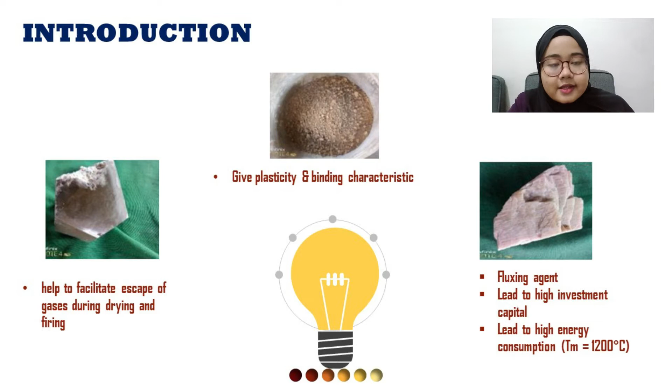The high price of feldspar is because it comes from natural resources. Using feldspar in the formulation of ceramic tile also leads to high energy consumption because the melting point of feldspar is high, which is at 1100 degrees Celsius to 1450 degrees Celsius. Next, I will continue with the problem statement.

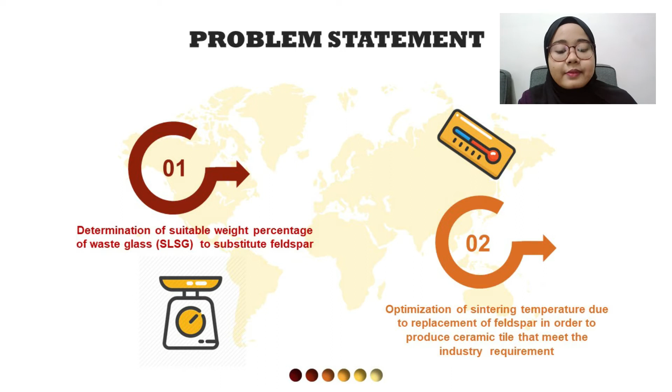The use of feldspar will lead to high cost because the raw materials are gained from natural resources, and it is difficult to gain compared to waste glass. In the previous study, the researchers have used waste glass in the formulation of ceramic tile. The problem statement is the determination of suitable weight percentage of waste glass to substitute feldspar and the optimization of sintering temperature due to replacement of feldspar in order to produce ceramic tile that meets the industry requirement.

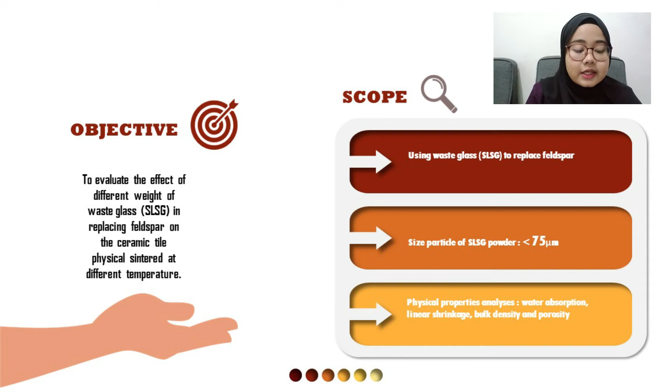The objective of this study is to evaluate the effect of different weight of waste glass in replacing feldspar on the ceramic tile physical properties sintered at different temperature. And the scope of this study: the first one is using soda lime silicate glass to replace feldspar. The second one is the particle size of material used is below 75 microns. And the third one is the analysis of the experiment is physical analysis, which is water absorption, porosity, bulk density and linear shrinkage.

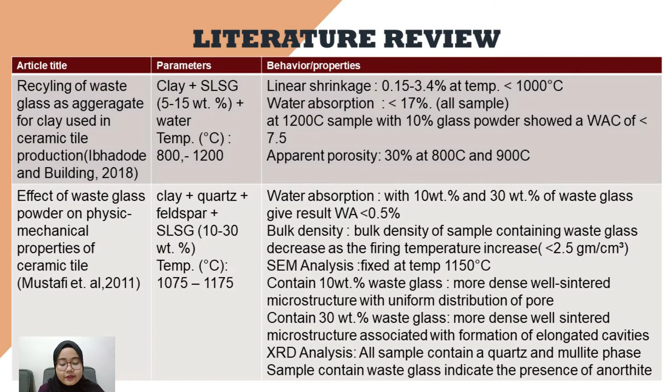For the literature review, here is the list of journals that I have referred. The first one is from 2018, with the article title Recycling of Waste Glass as Aggregate for Clay Used in Ceramic Tile Productions. And the second one from Mustafi et al. 2011, Effect of Waste Glass Powder on Physical Mechanical Properties of Ceramic Tile.

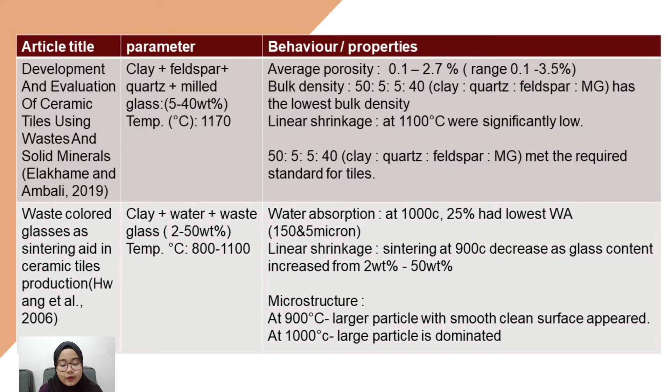And the third one is Development and Evaluation of Ceramic Tiles Using Wastes and Solid Minerals by Elakhame and Ambali 2019. And the last one is Waste Colored Glasses as Sintering Aid in Ceramic Tile Productions from Hwang et al. 2006. Okay, next I will continue with the methodology.

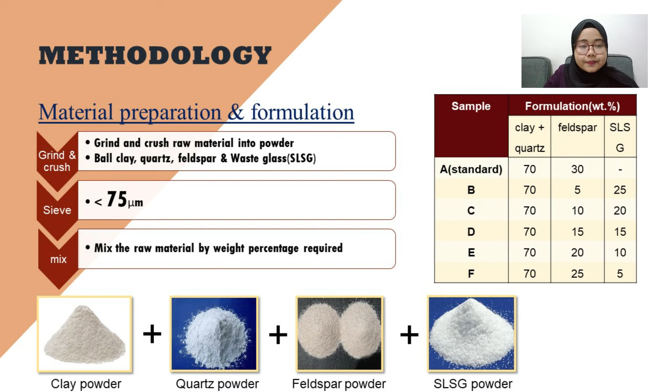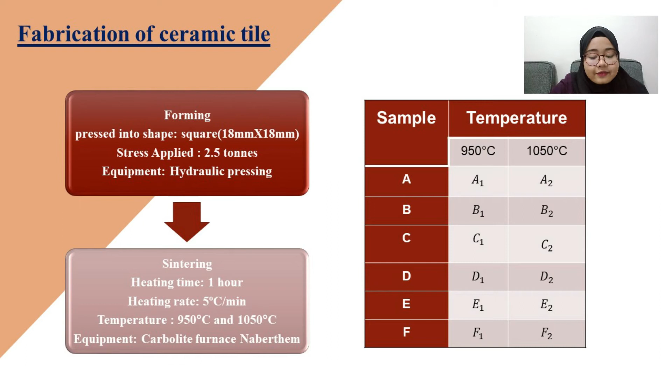Then the experiment will continue with the fabrication, which is forming and sintering. In the forming process, the mixed material was pressed into a square shape of size 18 mm times 18 mm by using hydraulic pressing. The stress applied is 2.5 tons. For the sintering process, the samples were heated at 950 and 1050 degrees Celsius by using a carbolite furnace. The heating time is 1 hour and the heating rate is 5 degrees Celsius per minute.

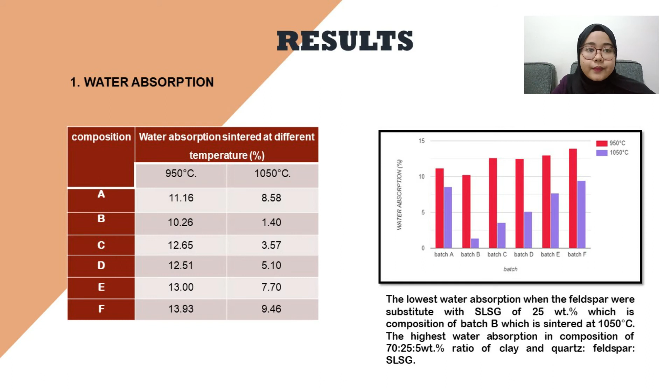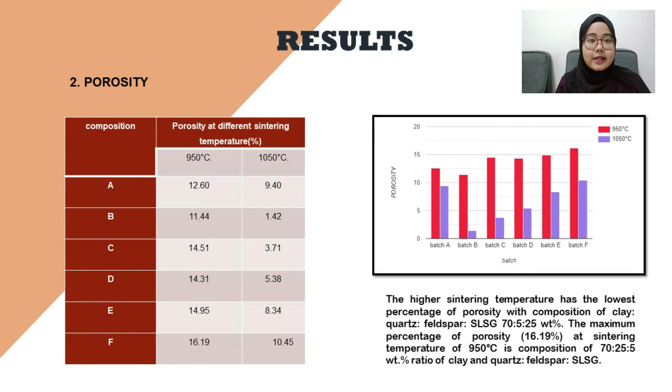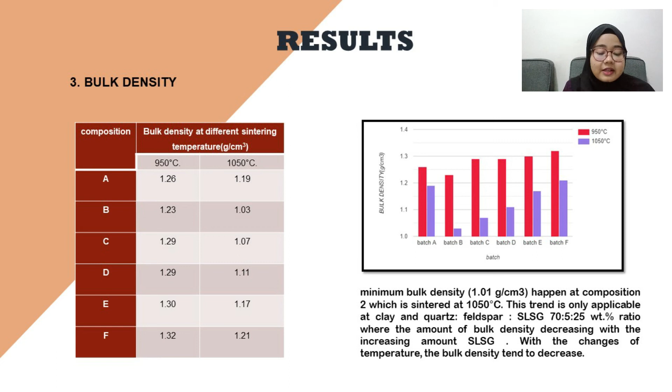I'll continue with the result of bulk density. The minimum bulk density, which is 1.01 gram per centimeter cube, happened at composition 2, which is batch B, sintered at 1050 degrees Celsius. This trend is only applicable at clay, quartz, feldspar and SLSG at ratio of 70, 5 and 25 weight %, where the bulk density decreases with the increasing amount of SLSG. With the change of temperature, the bulk density tends to decrease.

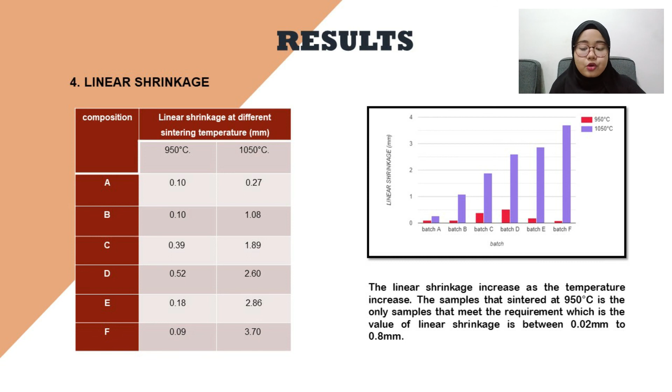The last one is the result for linear shrinkage. The linear shrinkage increased as the temperature increased. The sample sintered at 950 degrees Celsius is the only sample that meets the requirement, which is the value of linear shrinkage between 0.02 mm to 0.8 mm. And the last part of this presentation is the conclusions.

All the samples cannot be claimed as ceramic tile because all the samples did not meet the requirement of Malaysian standard ISO. From the outcomes, a few conclusions can be drawn: physical properties were tested on all samples. According to the analysis, the sample of batch B, sintered at 1050 degrees Celsius with the ratio of clay, quartz, feldspar and SLSG of 70, 5 and 25 weight percentage, has the lowest water absorption, with a value of 1.40%, and porosity, with a value of 1.42%. This is due to the presence of both feldspar and SLSG in the mixture.